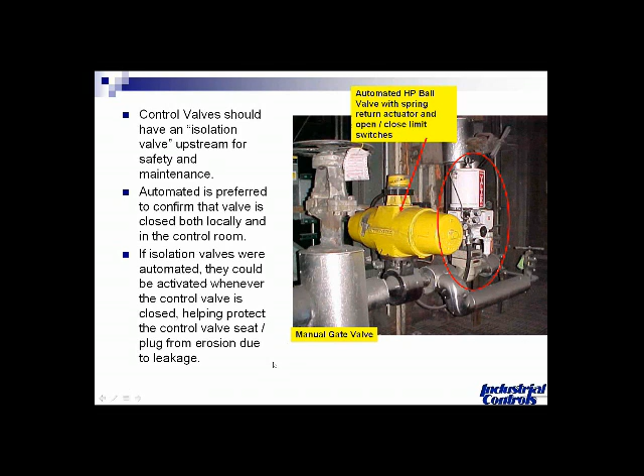Some of the solutions, more solutions to resolving control valve leakage besides having an isolation valve upstream: we mentioned earlier that the conventional positioner that is used on a control valve potentially can actually worsen the leakage from class 4 to class 3. There also is another factor here, that conventional positioners constantly need calibration, and the zero setting of those, which is the closed position typically, will drift.

And in many cases, after several months or up to a year certainly, the zero position could drift to 2 to 3% open of the valve. So when you're in the control room, you think your valve is in a closed position. The reality is it could be actually 2 to 3% open, and you don't even know it.

So one of the solutions that a lot of people are going to these days, and it's a well-proven technology now, is called a smart positioner. Smart positioners have microprocessors on board, and all the key manufacturers make them: Fisher, Masoneilan, Warren, Leslie, all the good control valve manufacturers have them. And it has what's called a tight shut-off feature.

And we mentioned earlier that potentially you could have air pressure in the bottom side of that actuator still pushing up against the spring because it's in a balanced position. Well, when you program the smart positioner, they will evacuate all that air out of there, guaranteeing that you have full spring thrust pushing down, which will help shut off your valve.

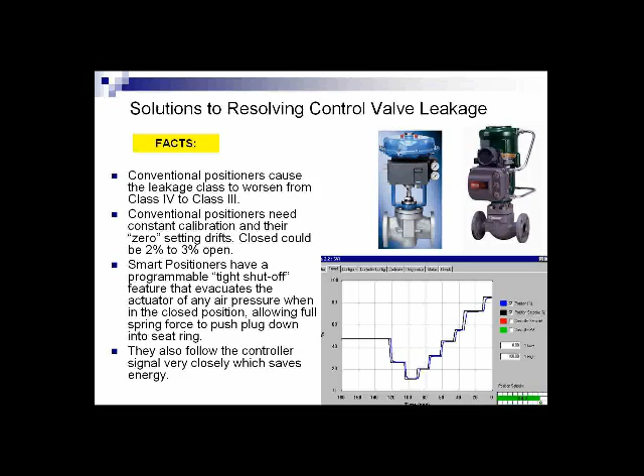This is a real technology breakthrough in the control valve industry, and smart positioners have been well accepted through almost all the different vertical markets.

Okay, this next slide is, I think, pretty interesting. I read an article in Valve Magazine somewhat recently about control valve leakage. And interestingly enough, the result of their studies found that many times the smoking gun was not the control valve, it was actually the bypass valve. In a lot of control valve applications, for different safety reasons or whatever, a bypass is installed in case the control valve has to be taken offline so they can still get flow through there.

And that is kind of the forgotten step in this, and many times that bypass valve doesn't get operated for potentially years. And anyway, they found out that a lot of leakage was happening on those valves, and nobody was paying attention to them, and they thought the control valves were leaking. So this is just something else to think about. It's just another place where potentially energy could be lost.

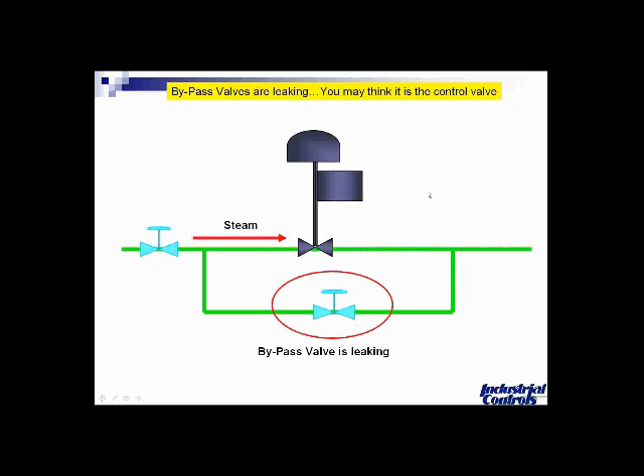So, okay, the second topic on our program agenda is called automatic boiler blowdown energy savings. First of all, I'm going to give a definition of what boiler blowdown is. Boiler blowdown is the removal of water from a boiler near the top surface of the drum level, which is, as you can see my pointer, right here at the top level of the drum. Its purpose is to control the boiler water quality and to minimize scale and corrosion.

Boiler blowdown is also used to remove suspended solids present in the system, and these solids are caused by feedwater contaminations from various sources. I'm not going to go into a lot of details, but it is an important step in creating steam in your boiler, and this can save you a lot of money if you have a good system here.

So in effect, some of the boiler water is actually removed and replaced with feed water, so that's what boiler blowdown is. And the amount of blowdown can range from less than 1% if you have extremely high quality feed water to greater than 20% if you have a poor feed water system.

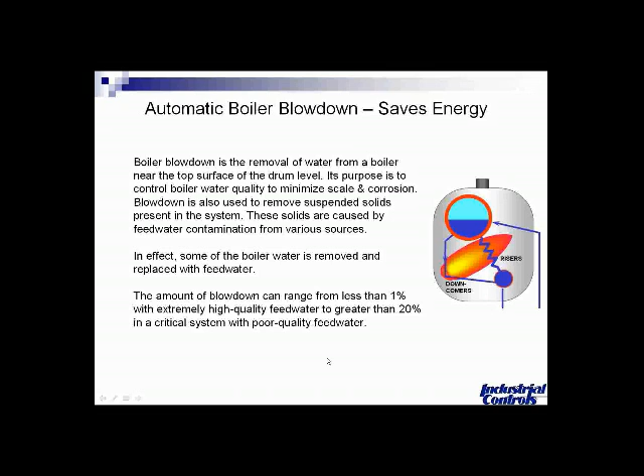If you were to install a proper boiler blowdown system, you would minimize energy loss and actually save about 2% of your facility's total energy use with an average payback of less than 1 year. That alone, I think, should interest you in possibly looking at something like this.

Excessive blowdown wastes energy in a variety of ways. You're actually wasting water, which you just went through the trouble to heat up, to put it into the boiler, and also treat it and clean it, and try to get it as high quality as you can, and you're yanking it off because you're trying to get the impurities off the top of the boiler drum. And also, there's a lot of very expensive water treatment chemicals that are in that feed water. So there's multiple savings to be had there.

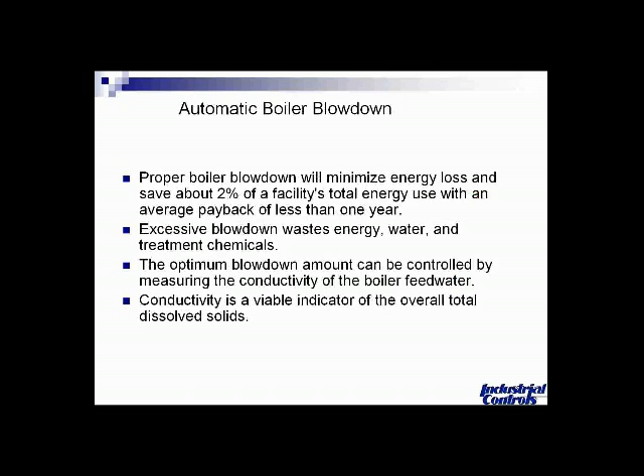If you can create the optimum blowdown, to do that, you need to measure the conductivity of the boiler feed water. Conductivity is probably the simplest and most widely used indicator of the overall total dissolved solids that is in your feed water or in your drum level.

This next slide shows you if you would install an automatic boiler blowdown system, some of the savings you actually would encounter if you were to reduce your blowdown by 2,000 pounds per hour. You can see the fuel dollars and the water treatment dollars. You're looking at some substantial savings there.

And by the way, just to go back. Typically boiler blowdown is done manually many times, and it can either be a sequential thing where you actually open it up every once in a while. You could do it every hour or every 2 hours or whatever. And then in a lot of situations you actually install or just have a valve that is called a continuous blowdown, where it is cracked open at a certain percent, and you pre-calculated how much you think needs to come off of the boiler drum. But again, those are not the best ways to actually try to control your

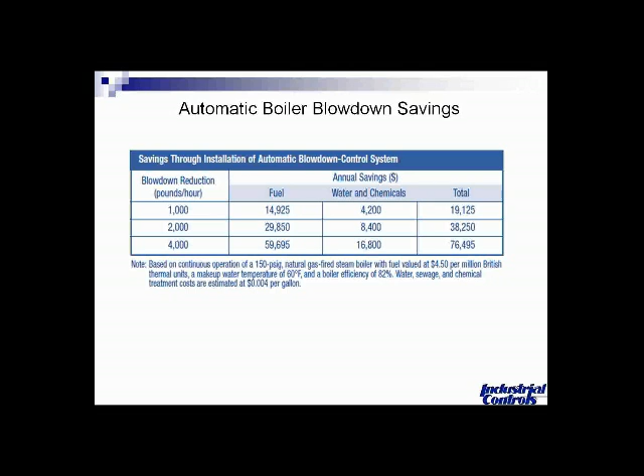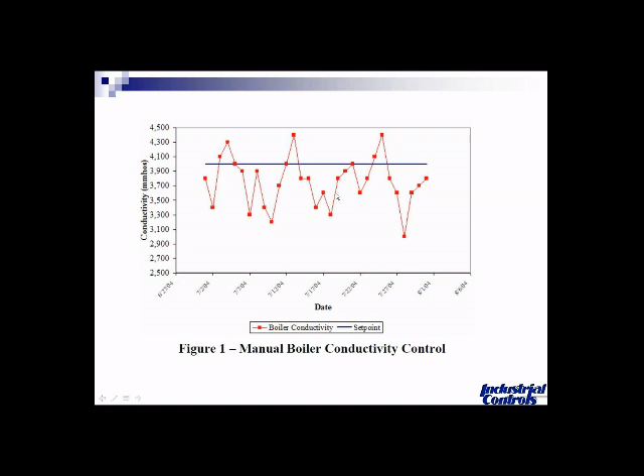boiler quality of water. This first slide will give you an example of you have a set point of how good the quality of water you'd like to have, and wait for the slide to come through. And the red line actually indicates, if you were doing this manually, how much control you actually would have over that. And you see, it's very hard to control that. You have a big sawtooth curve there, and you're definitely not in control at that point if you're trying to do it manually.

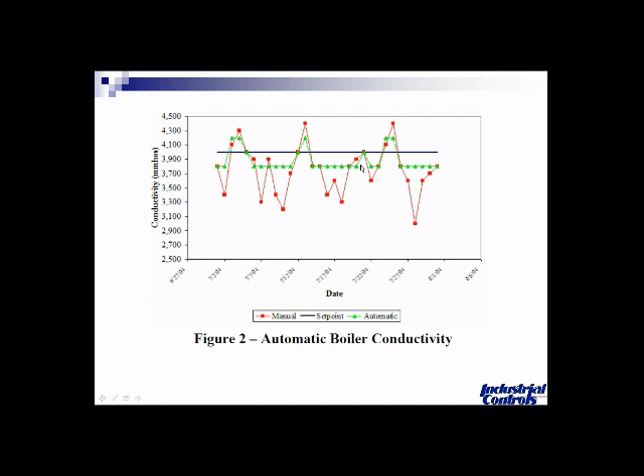And it's programmed. In this case, this one is programmed to take samples on a timed basis, and that could be literally every 15 minutes, or it could be every hour. Or again, you need to determine that based off the quality of your feed water.

It's very important that the sample be cooled. This particular system is set up and designed that it will cool the sample. The quality of the reading of the conductivity is better when the water is cooled.

So you compare the conductivity reading to your set point, and then the controller sends a signal out to the control valve to remove water from the steam drum surface. And again, I mentioned earlier that the reason you want it removed from the surface is that's where the highest level of solids, dissolved solids, are located at.

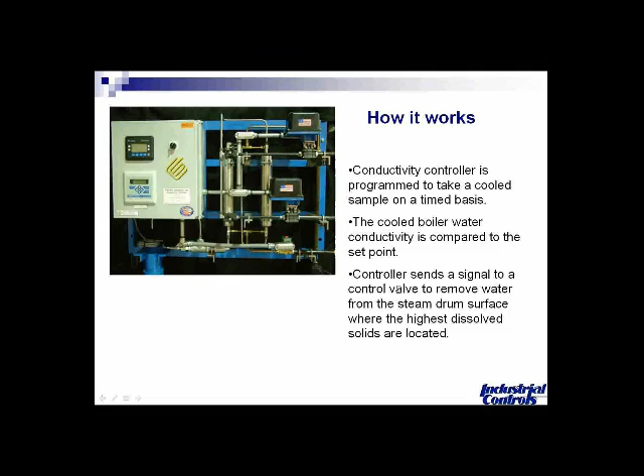Okay, the next item on our agenda is, are your valves really closed? I know, again, that sounds like an absolutely silly question, but if you have the typical manual gate valves or globe valves, if you're just standing there looking at them, sometimes it's very difficult if they don't have a rising stem where you can actually tell what's going on with them. It's very difficult to look at them and know if your valve is fully open and closed.

And also multi-turn valves such as the gate valve or globe valve there to the right, they tend to bind up, especially if they've been in an open or closed position for any period of time. And many times the operator goes up and grabs that handle and tries to turn it, and it gives a false feel that maybe the valve might be closed because it becomes bound up. And an over-tightening of the packing gland can seize the valve, sometimes just the stiction of it being in one position for a long period of time.

So in some cases, it's a little bit dangerous for these manual valves. Like I said, you go up there, you turn it, and you think, I can't turn the thing, so you might think the valve is closed, and the reality is it's not.

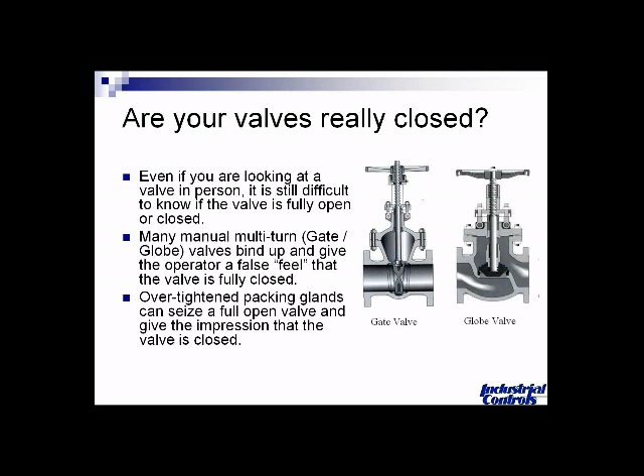So for some of the answers to what can we do to verify if your valves are closed, like a gate valve or a globe valve, would be to automate those. And typically these large multi-turn valves are done with electric motors, either Limitorque or Rotork or EIM or all the big manufacturers of those. And there's no question that initially the costs are substantial in automating those. You're going to get into the thousands of dollars very quickly when you start putting a multi-turn motor actuator on these valves.

But the payback is what you really have to look at, and you're controlling your valves and actually managing them properly. First of all, you can give a remote signal to open and close these valves, so you don't have to send that person out there to try to turn that handle and see if the valve's open or closed or not. And you also get an electronic confirmation signal back in the control room of what position that valve is in, whether it's at mid-stroke or full open or full closed.

Also, I think one of the pluses of the multi-turn electric actuators is that they use torque switches actually to determine their closed position, which means they're driving the plug or the disc into the seat, and they drive it into a pre-programmed torque area before that motor shuts off. So in my mind, you're getting the best of both worlds, where you're getting a good tight push into the seat with those torque switches determining that.